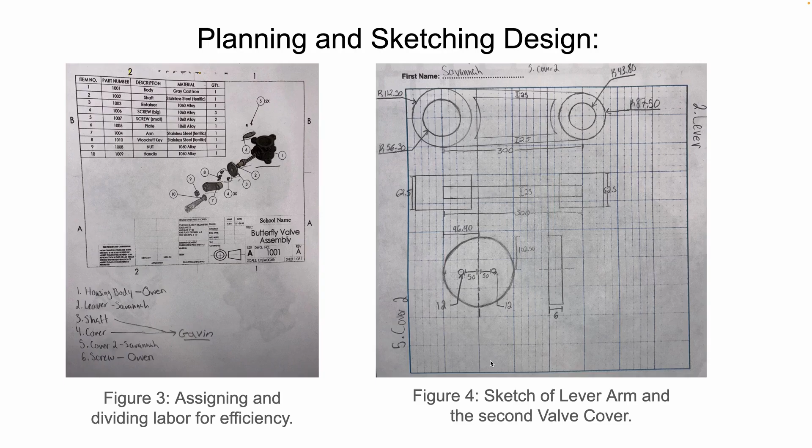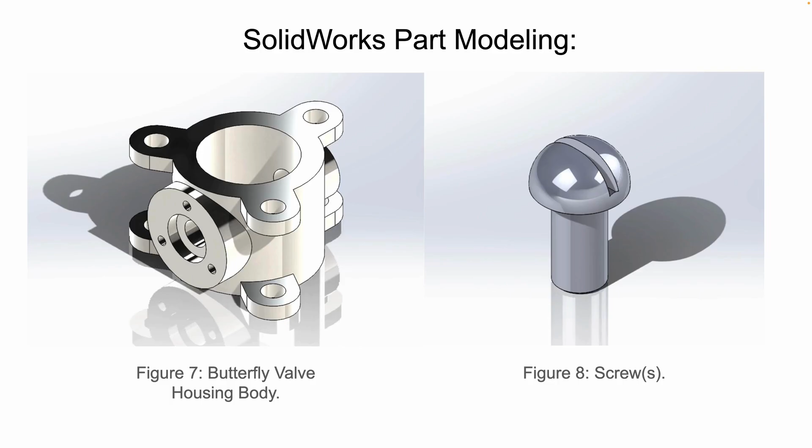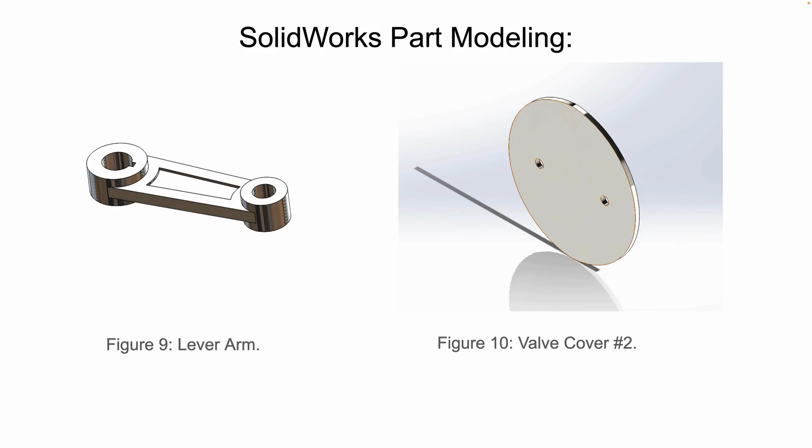Figure 9 is the lever arm. The lever arm connects to the shaft in order to rotate the second cover. Figure 10 is the second cover. The cover is responsible for letting the fluid flow or stopping the fluid from flowing.

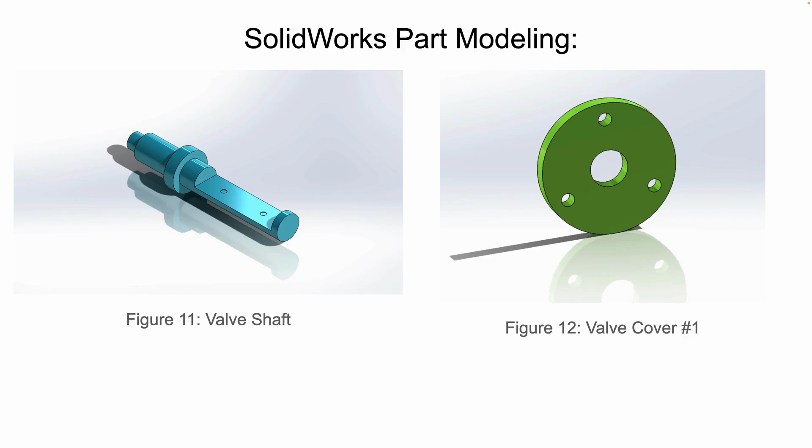Figure 11 is the valve shaft. This part was modeled mainly using revolved base and extruded cut. Figure 12 is the first valve cover. This part was modeled using extruded base, extruded cut, and circular sketch pattern.

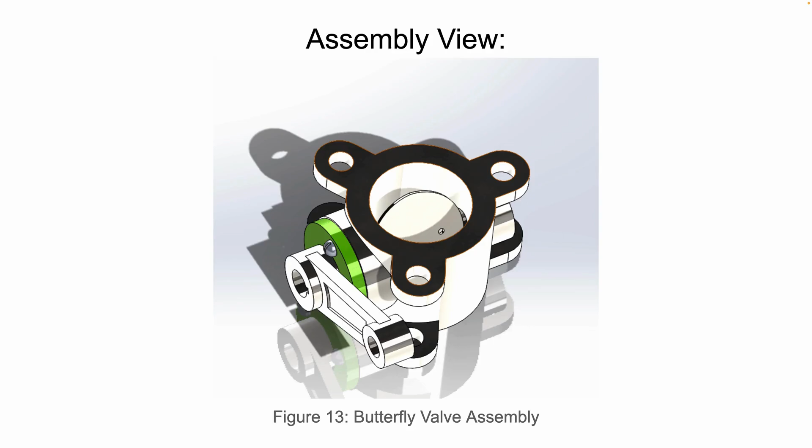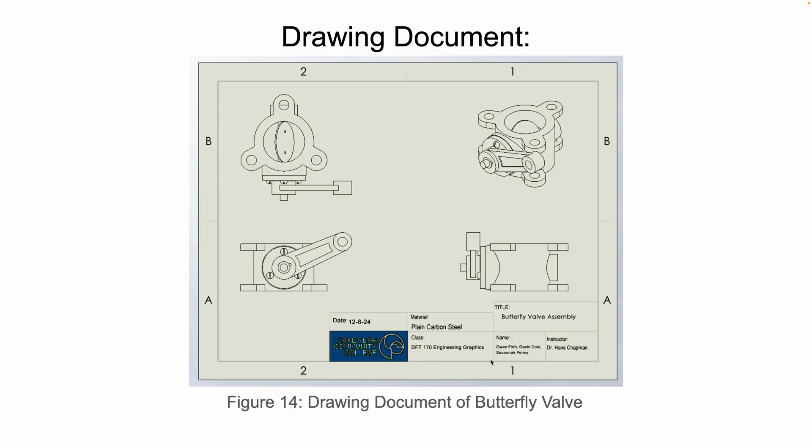This is the assembly view. Notice the first valve cover in green holding the lever arm and the shaft together. This is our drawing document of the assembled valve. You can see the front, top, right, and isometric viewpoint of the valve.

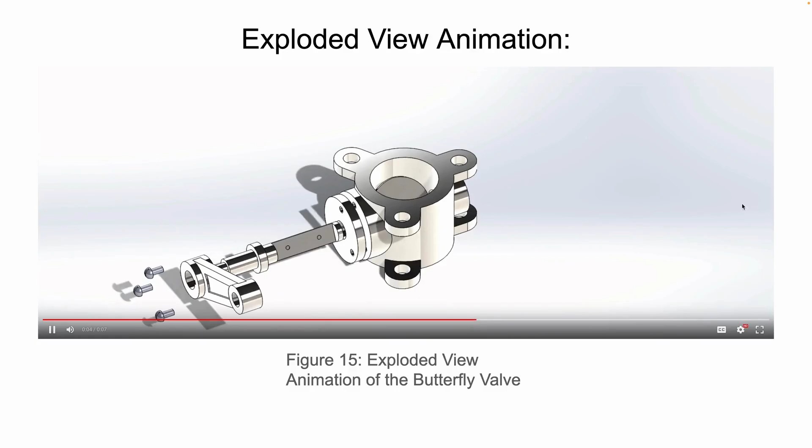And this is the exploded view animation. Notice how the 3 screws hold the valve cover in place. This is the assembly simulation. It shows the yield strength of the second valve cover, which holds back the fluids attempting to pass through. The valve cover withstood 500 newtons of force, making it ideal for withstanding the pressures built up by the fluids.

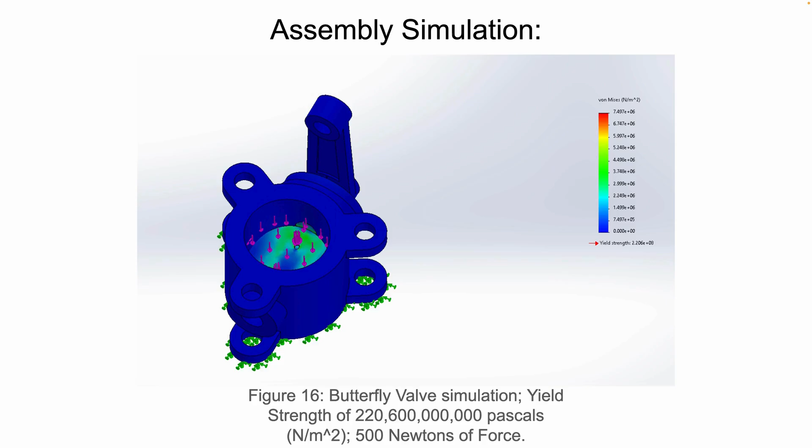As a team, the main takeaways were creating drawing documents, simulations, animations, 3D modeling, and last but certainly not least, teamwork. With these points in mind, we utilized tools such as mates in assembly, revolve base, extruded boss base, extruded cut, mirroring, and circular sketch pattern. Utilizing the tools provided to us by SOLIDWORKS, we were much more efficient in these aspects. Overall, we incorporated a multitude of design tools and clear, concise communication between team members to maximize efficiency.